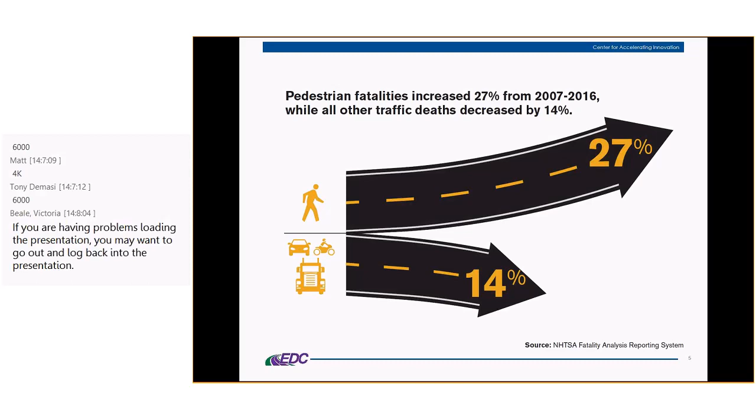And just another quick fact, GHSA, the Governors Highway Safety Association, just recently had a press release, and I'll put the link in the chat pod. But unfortunately, they are estimating that 2018 is going to have the highest pedestrian fatality rate since 1990, so more than 6,200 pedestrians killed. So I'll make sure I put that link in there.

Yeah, that's not good news, and so we've got a lot of work to do. So this slide, Becky, shows the trend going in the wrong direction for pedestrians. But we are making progress with regards to other modes, aren't we? I mean, we've been putting a lot of effort into strategic highway safety plans and other types of efforts in the other modes. And I'd say we've done some things in the past with pedestrians, but we can definitely do more, and we need to ramp up. So absolutely.

I'm almost wondering if we should ask another poll. Yeah, those are the national numbers. I think now, since we're talking to an Ohio audience, let's have them see if they can answer these questions here. So give them a few minutes, or not a few minutes, but maybe a minute. Sure, they can work quickly. And if you just want to pick the question that you want to ask, you can just put it down there in the chat pod.

The percent increase in pedestrian fatalities, and now this is just for Ohio, and then how many people died. So Becky, in 2017, these are the numbers, and in the latest report they did a comparison between '17 and '18, and I looked at Ohio, and they did actually increase as far as pedestrian fatalities. So, okay.

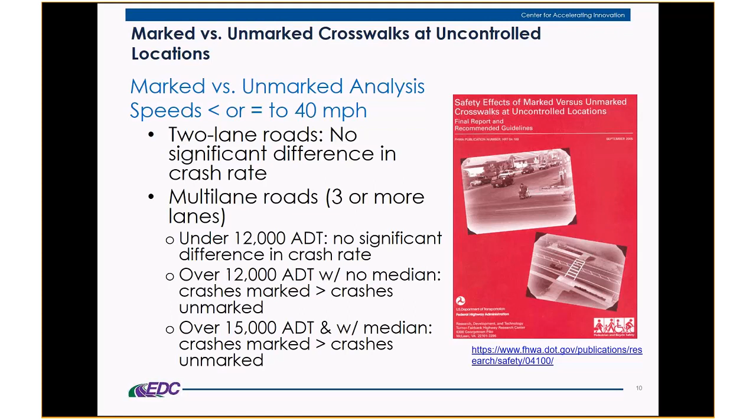And so people thought, well, then I won't put marked crosswalks out there on those types of situations, right? Well, that's not what the study was saying. It actually is saying that you need to do more than just a marked crosswalk in those situations.

And in the 2009 MUTCD, they changed the language, added a section with regards to new marked crosswalks. New marked crosswalks alone without other measures designed to reduce traffic speeds, shorten crossing distances, enhance driver awareness of the crossing, and/or provide active warning of pedestrian presence should not be installed across uncontrolled roadways where the speed limit exceeds 40 miles per hour and/or either in those situations with 4 or more lanes, and then with ADTs of 15,000 or 12,000 without a median and 15,000 even with a median.

The key thing here is that those other measures to reduce traffic speeds, shorten crossing distances, enhance driver awareness of the crossing - those are important, and those are the treatments that we're going to be getting into that help with regards to that, those additional treatments in addition to just marked crosswalks.

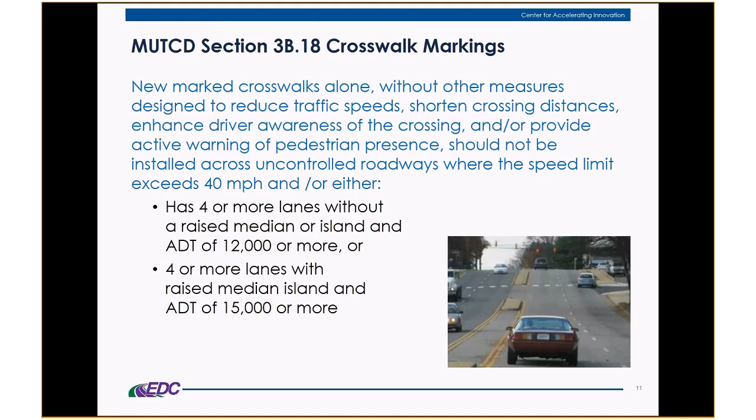So the study back then in 2005, often referred to as the Zegeer study, it did have a table in there with regards to the ADT, the speeds, and the number of lanes, and it talked about candidate, potential, and then also not marking - C, P, and N. They just used these letters to designate what they should potentially do.

What we did under the STEP, the last round in 2018, was develop this guide, the Guide for Improving Pedestrian Safety at Uncontrolled Crossing Locations, made a similar table to the Zegeer study, but then actually recommended - and these are just guidelines, these are recommendations - for some different treatments.

So let me give you an enlargement, and then you'll be provided the PDF for this presentation today, so you can easily access the hyperlink to download the guide. But you can see here that you've got the ADTs, the speeds, and then the number of lanes, and then the recommended, what we call the Spectacular 6.

And you may have picked up that we mentioned the Spectacular 7 earlier, and I'll explain why that is now. But back then in round 4, we had the Spectacular 6, which would help with these crossings at uncontrolled locations. Now that's the other thing - uncontrolled locations, meaning no signals, no stop signs, okay? Because the majority of crashes happen at crossings, and a high percentage happen at uncontrolled locations.

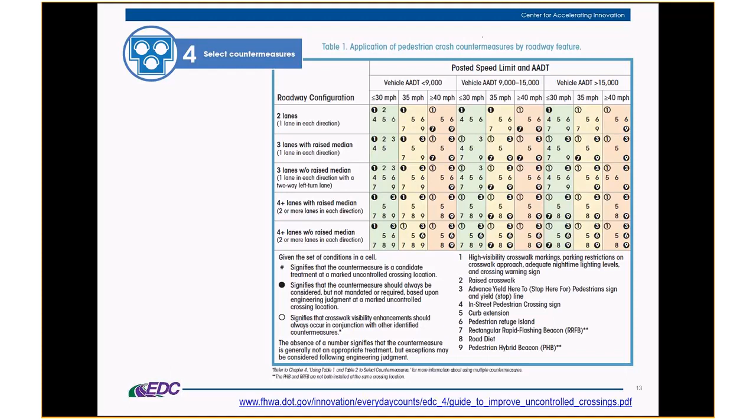In this round of STEP 5, we are including crossings in general at all crossing locations, even at signalized locations. So we are going to be bringing in the leading pedestrian interval for signalized locations. Now, some of these treatments here also can be used at signalized locations, but when we developed this guide at that time, it was mainly for uncontrolled locations.

The guide also goes into a 6-step process with regards to what you can do to improve pedestrian safety, which starts with the data collection, doing inventories, crash analysis, and then step 4, which is selecting countermeasures - which I'm going to just quickly introduce you to the Spectacular 7 - and then looking at your design guides, resources, other types of opportunities, standards that are out there. And then step 6, which is actually implementation and opportunities and how to overcome barriers. So, great guide - we recommend that you would download that.

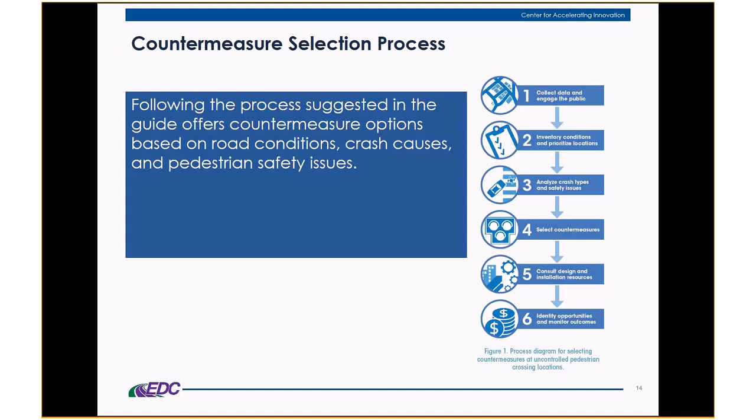But as mentioned, I'm going to mainly be focusing today on the spectacular 7, with the leading pedestrian interval being more for signalized locations. So those 7: crosswalk visibility enhancements, raised crosswalks, pedestrian refuge islands, the RRFB which is back and we're very happy that it's back, the PHB (pedestrian hybrid beacon), road diets which has been around for a while, and then the LPI.

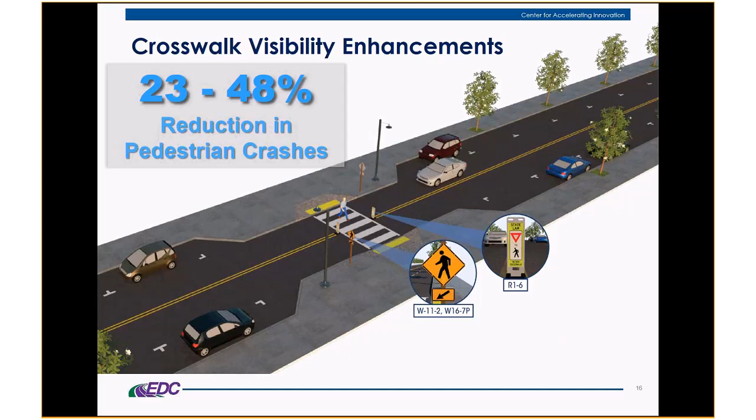Okay, so let me just quickly go through these. The crosswalk visibility enhancements have a great crash reduction factor, with a range between 23 to 48. The reason there's a range is because we try to incorporate as many other types of countermeasures into this, such as signing, curb extensions, curb radii, lighting, markings. So it covers multiple countermeasures, with subcategories within the crosswalk visibility enhancements.

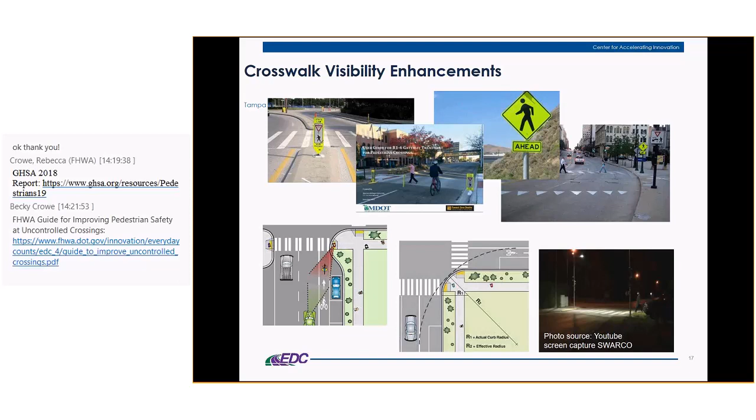Great research on the gateway with regards to the in-street sign. You'll see that up in the upper left-hand corner where they're using it as a gateway, multiple signs. This is a low-cost treatment. There's some additional research happening in Michigan and Florida with regard to those. We'd love to talk to you more about that in the future in our workshops.

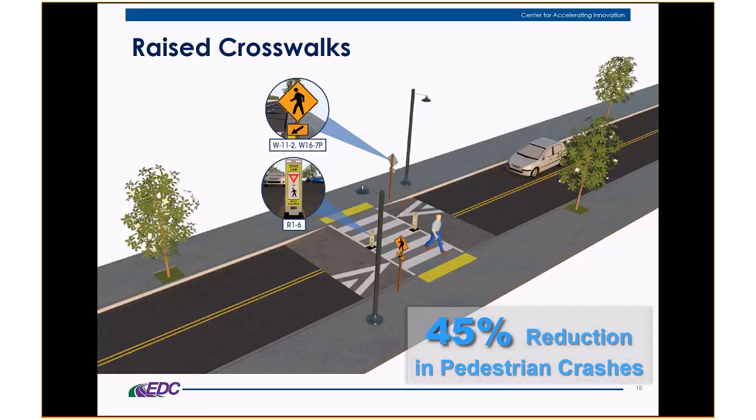The raised crosswalk has a 45% crash reduction factor, works great especially on slower 2 to 3 lane roads with slower speeds, but there are some considerations like snow plowing and so forth. All these STEP treatments do have some limitations, and we talk about that. You're not going to put raised crosswalks on 45 mile per hour roadways. So we will talk about in some of the treatments in the workshops where the appropriate applications are.

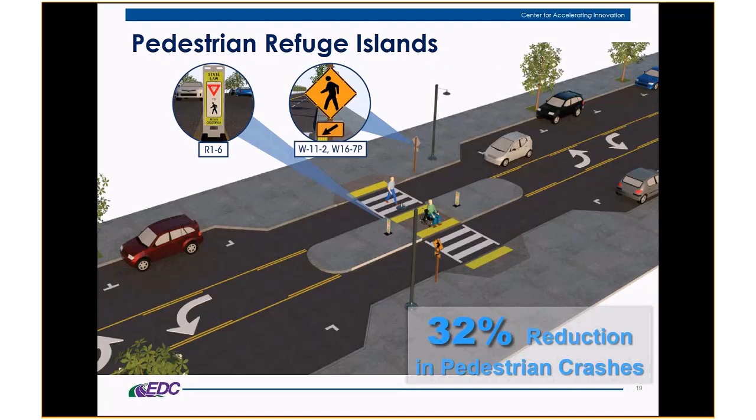Pedestrian refuge islands have been around for a long time. I call them the oldie but the goodie. 32% crash reduction factor, but it's great, especially when you have a 2-way left turn lane there, to provide some protection, breaks up that crossing so pedestrians only have to look in one direction and then the other direction to cross the roadway. Very effective but underutilized, we believe.

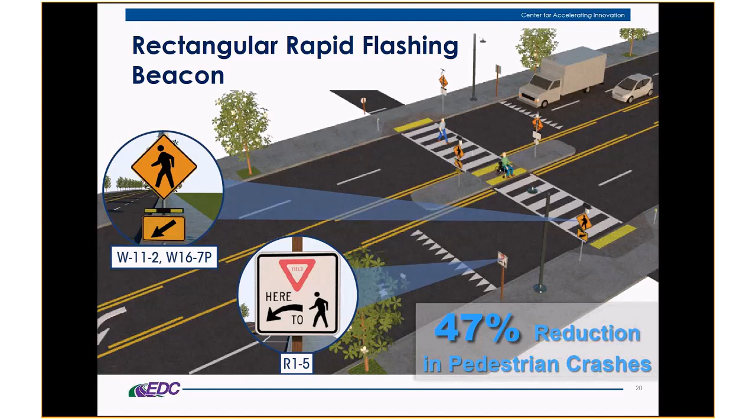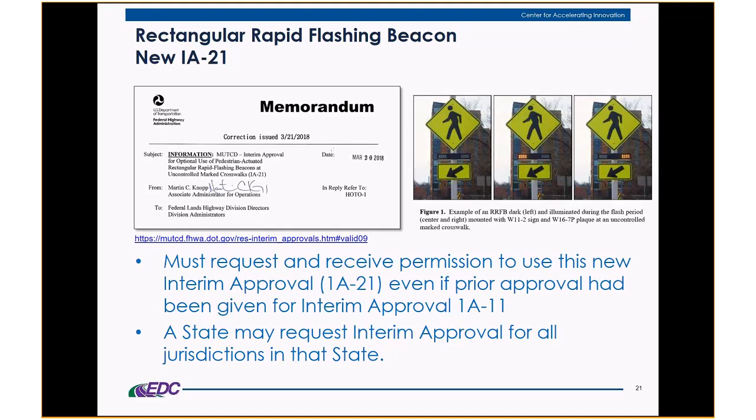Now the rectangular rapid flashing beacon, it's back. We're very happy that it's back, and many of you are probably familiar with this. We do have a new interim approval 21, so 11 is out. I suspect that Ohio probably did a blanket statement statewide, like a lot of other states, to have all agencies under that to be able to use interim approval 21. I've got the link there that you can take a look at, but just a couple of highlights with regards to the interim approval.

You do have to have 2, one on each side of the roadway. Now if you have a median, as in this situation, you can go ahead and put that in the median. But you do need to have one on the left and the right side, and these are best used on multi-lane roadways to get drivers' attention from quite a distance back to let them know that there are pedestrians wanting to cross at that roadway.

Once again, this isn't a... I just a few months ago heard about a situation where they were using, they had put some of these out on a 6-lane roadway, high speed, even with the advanced signing with the RRFB. So they had 4 altogether in one direction, and they had some fatalities. So there is an upper limit as to where these are going to be able to be used.

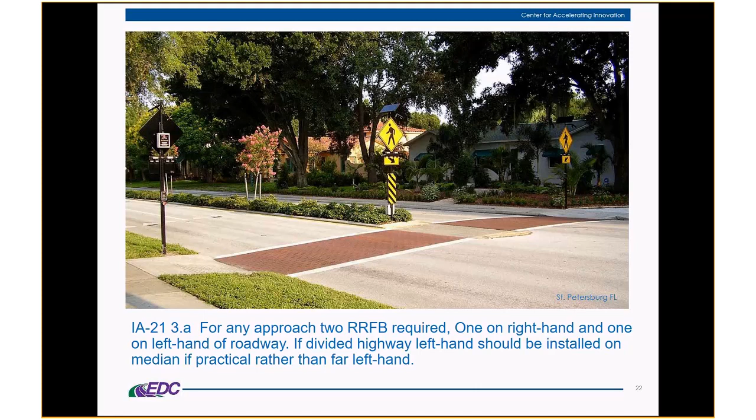We're still learning a lot. So with that, you do want to be careful with the application of these. Usually 30 to 35 miles per hour, maybe even 40 if you've been using them a lot, but making sure you have the proper installation that would work.

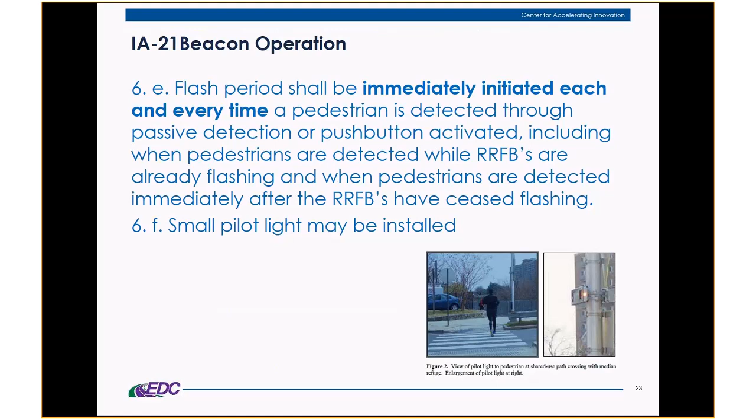These also, interim approval 21 states that the flash period shall be immediately initiated each and every time a pedestrian is detected, whether through passive detection or push button activation. So that's what I love about this. You push it, they get that signal indication to drivers that the pedestrian is wanting to cross. There's no delay on this.

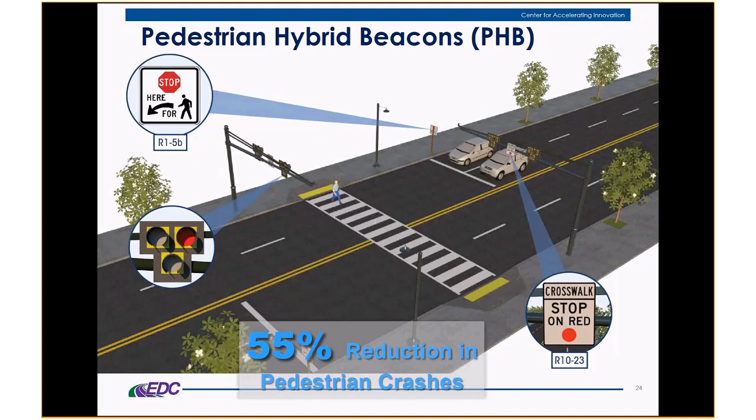Now I give that example with regards to the 6-lane high-speed road. Those types of roads really, many of them, you're probably going to have to go to the pedestrian hybrid beacon or a signal. But the pedestrian hybrid beacon I really like because it really does a good balance between pedestrians and having vehicle progression as well. So, 55% crash reduction factor of pedestrian crashes here. This is how the phasing is.

You can see here on the wigwag, that's where the vehicles stop. If the pedestrian is cleared, they go ahead and proceed. So it's a great application with regards to mid-block crossings, especially.

You can actually coordinate this with signals. A lot of agencies will do it during peak hour, coordinate, and then do a hot response on off-peak hours so that pedestrians get the signal fairly quickly and not have to wait.

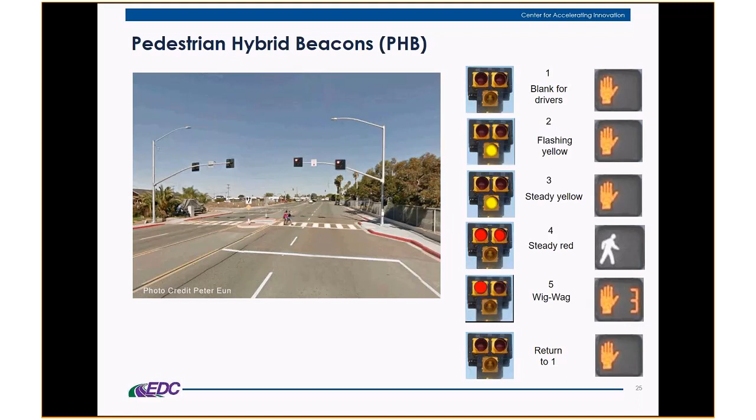There's one other point I'd like to make with the pedestrian hybrid beacon. We're seeing across the country, some states thinking that the guidelines in the MUTCD for pedestrian hybrid beacons are actually a warrant. Now there is a signal warrant. I've overlaid that, the minimum number of pedestrians needed per hour, 93, to put in a signal.

But for pedestrian hybrid beacons, these are guidelines, they're not warrants. As far as the national standard, some states have actually made it more restrictive and made it an actual requirement to have minimums, which we would not recommend. I think you always want to allow for engineering judgment.

Just to note, the tables in the MUTCD are guidelines for that 20. So maybe you have 18, or maybe even 10, but you've got a situation where you want to put a PHB in. Using that engineering judgment, doing that engineering study, you're allowed to do that. And oftentimes there's latent demand, so there is some flexibility with that.

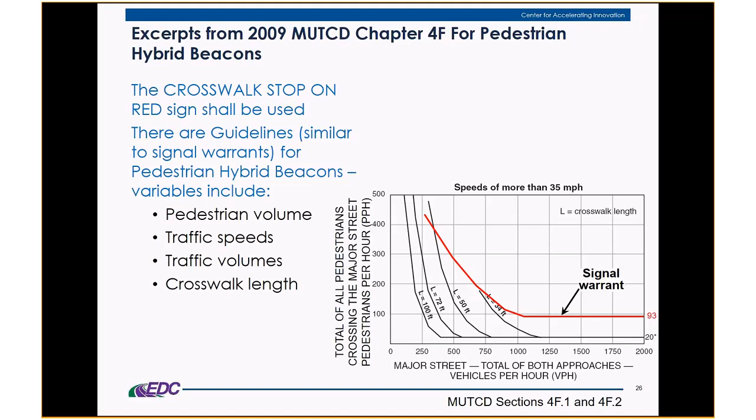And with that, hey, I'm going to have Becky. Yes, well, I just wanted to talk about the success story that we have in Florida.

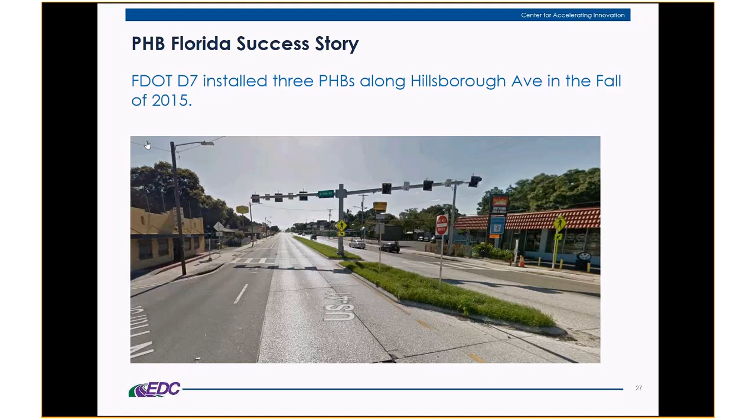They have been using PHBs along Hillsborough Avenue, and they installed those in 2015. They were having a big problem with crashes, up in the double digits in terms of fatals. You can see their crashes from 2010 all the way down to 2015, and after they installed these 3 PHBs, they had a significant reduction. So just a lot of success using those PHBs in Florida. We love spreading that information around.

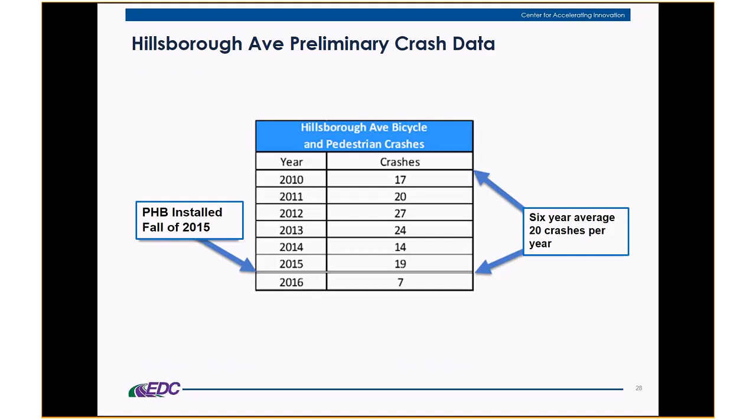The next, I guess final, countermeasure that we're working to advance are road diets. I've been working with road diets for the past 6 years. I know we have several of those in Ohio, and I believe we've done some training up there.

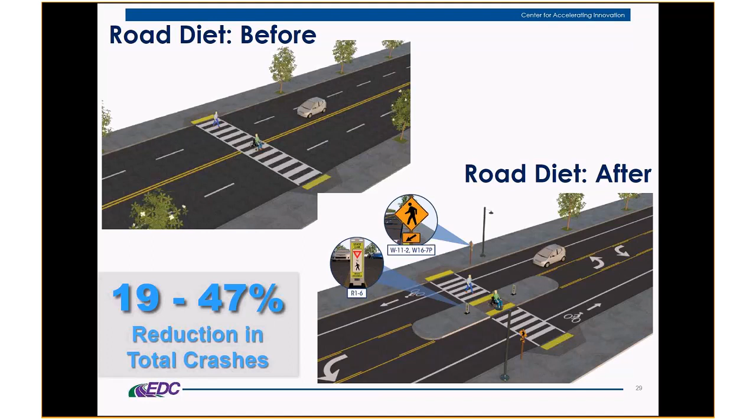You can see that 19 to 47% reduction in crashes, especially when you include that median there. It really does provide a safe refuge for pedestrians, and it's very inexpensive, especially if you have an overlay project and it's just a matter of restriping the roadway.

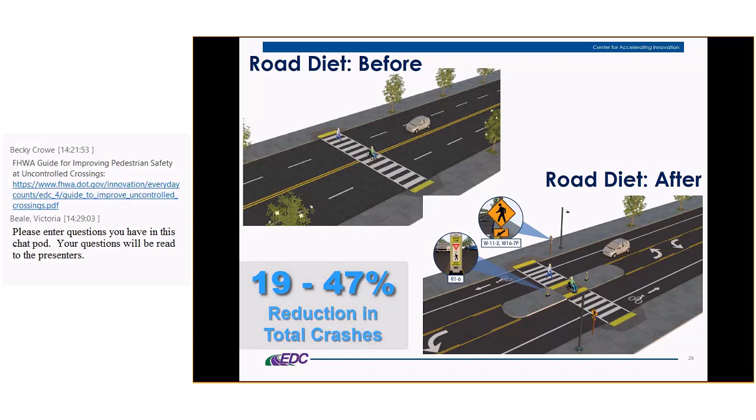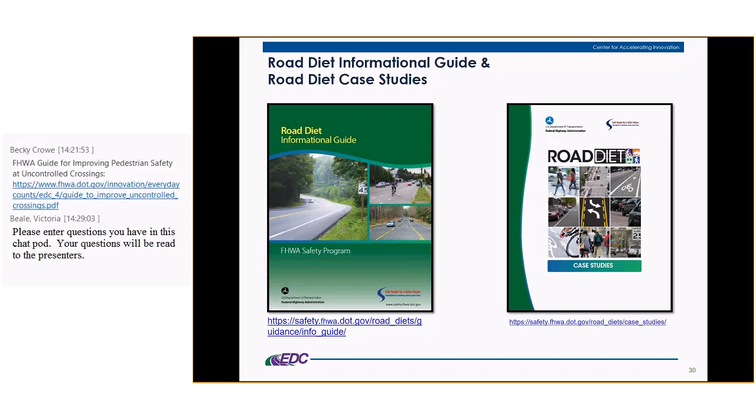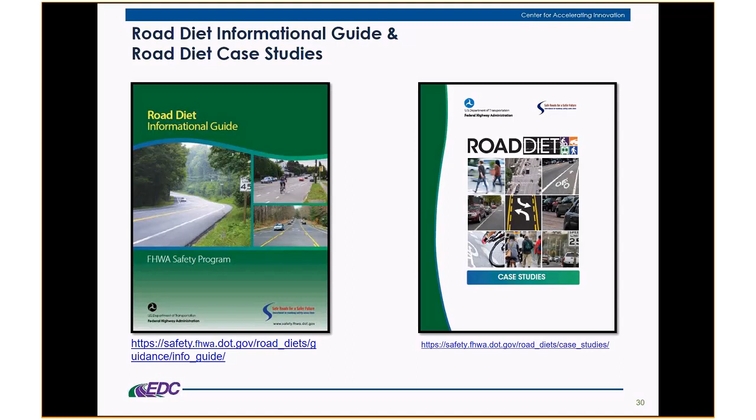We do have a lot of good guidance for road diets, when it makes sense to put those in. We've developed the informational guide that's available online, and you can download it. We have a number of case studies similar to the Florida Hillsborough Avenue study, where they've implemented a road diet or roadway reconfiguration and had some really great results. There are a lot of considerations in terms of road diets, when to put those in.

First and foremost, there's safety. Operations were really focused on the peak hour when you're looking at a road diet.

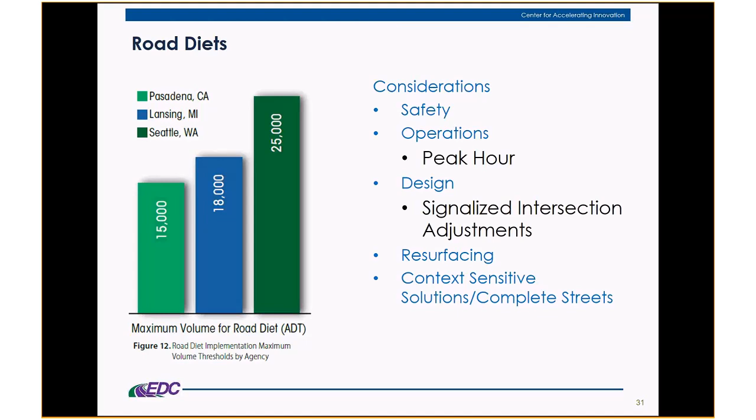Another thing I'd like to bring up in terms of intersections is roundabouts and road diets, they just work so well together. The dog bone design, we're seeing it used all over the country. Just a really safe design to consider.

And then something we always like to bring up with road diets is that you really need to make sure you focus on those signalized intersections and make sure they are working properly after you reconfigure the roadway. So with that, I think we have some fun, don't we, Peter?

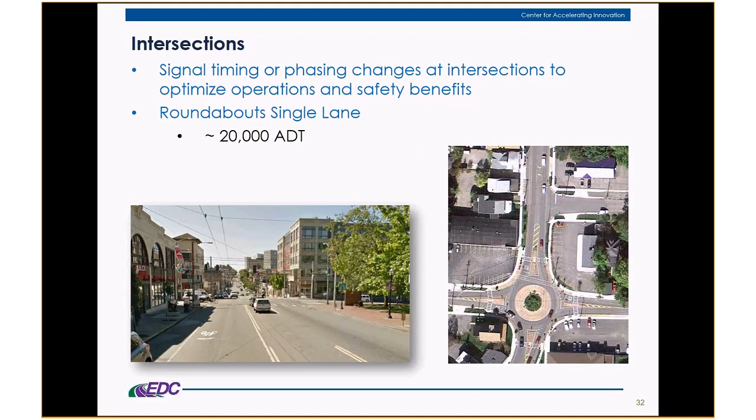Yeah, I think the audience probably wants to take a little bit of break, like in a live talk show, they always have music, right? Music always makes people happy. I love music. So we got an original, this is the number one music video on the Engineers Billboard charts. It's actually written and sung by our own Wayne Emmington of Federal Highways in the Maine Division Office. Let's go ahead and enjoy this. Hopefully this works.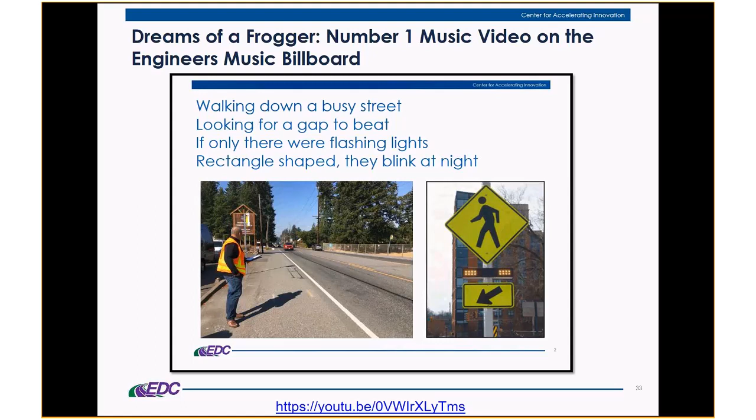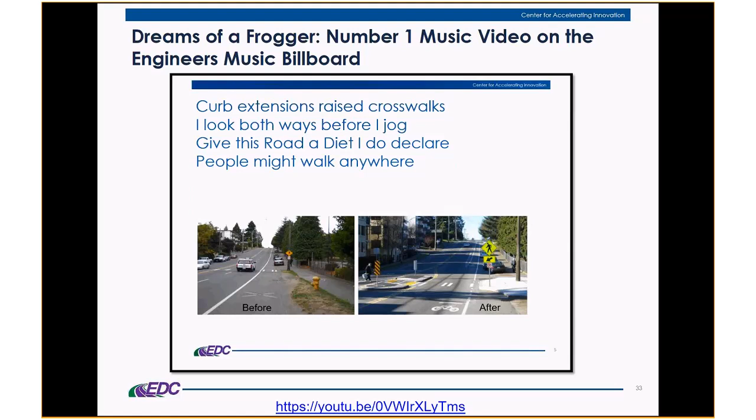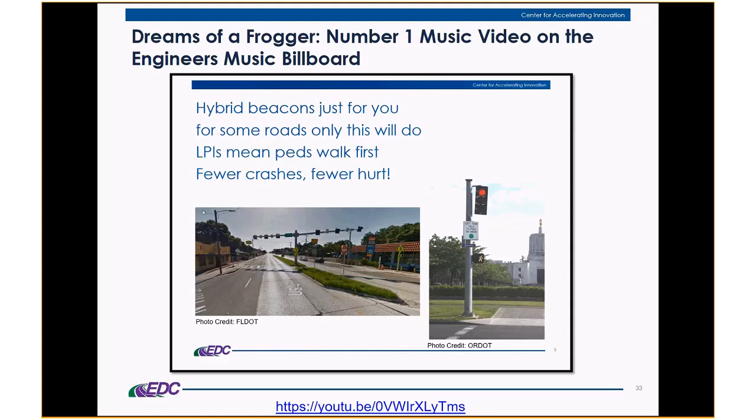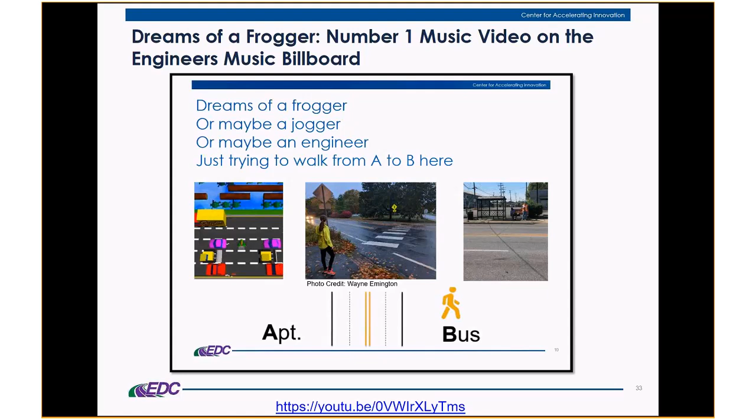All right. Did that come through there, Becky? It did. I feel like we need to clap. Yeah, that was great. All right. Yeah, that was a great job. By Wayne Emington. Love that song, and we're actually trying to get him on Jimmy Fallon to sing it. So, hey, we got some claps in the chat pod. I hope everybody got a chance to maybe play a game of Frogger as we were waiting for the webinar to start.

But there is method to our madness. The reason that we put Frogger up there is because the main point we're trying to make is that it's very similar to real life. When a pedestrian's out there, they're trying to find a gap in traffic, look both ways. If people are making a lot of turning movements, they get impatient, they're in a hurry, it's difficult. In the past, when Peter and I have actually used Frogger in training environments in person, you can see people getting very nervous. They're trying to move Frogger through. So what we're trying to get the point across is that we're just trying to make it easier on everyone, on the pedestrian

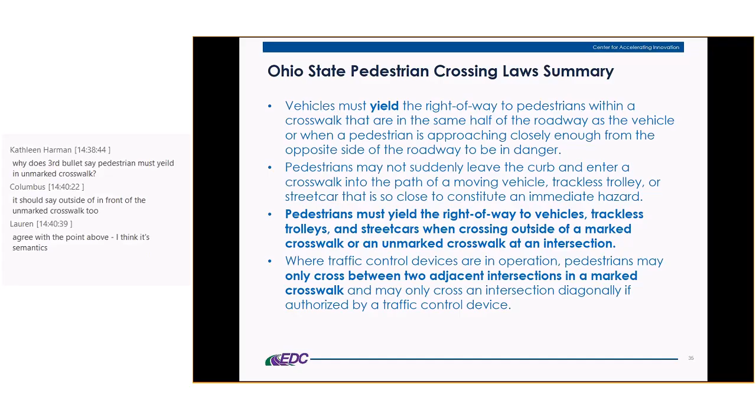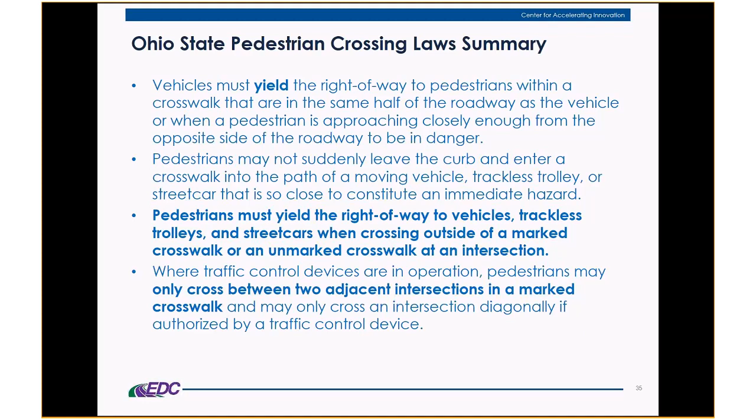Yeah, that's why we have the whole legal system. So very good catch, though, because the way you could read that, the way I just read that, you're right - it says pedestrians must yield. But in all other states that I've seen, pedestrians at an unmarked crosswalk at an intersection, the drivers are supposed to yield, whether marked or unmarked. So we'll take a look at that. Thank you for whoever wrote that comment.

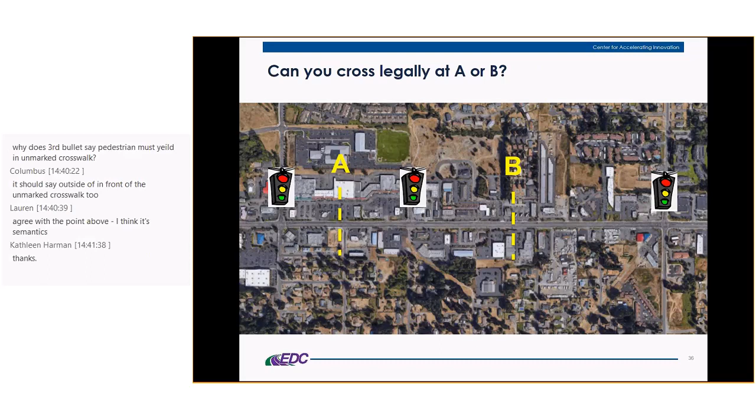So in this situation, can you legally cross at A or B? I don't know, let's see if we get some comments in the chat pod on this. Are we getting some responses there, Becky, Victoria? Not yet, but it looks like at A there is a continuation of a street, correct? Yes, there's a T intersection there. And so based upon how we're interpreting what we just read, maybe there's some confusion.

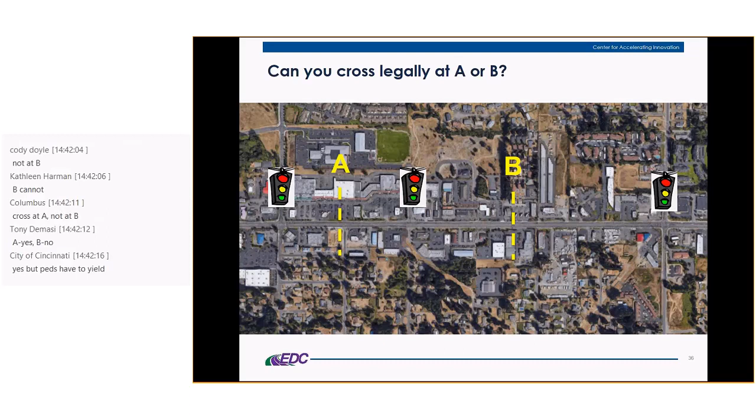So yes, if it's not marked, then maybe the pedestrians have to yield to the vehicles. But in every other state, even though it's not marked, the drivers are supposed to yield to the pedestrians. Now in B, there's less - based upon what was written there, and it's pretty standard across the country in a lot of states, because there's no roadway in between those two signalized intersections, pedestrians are not allowed to cross at B. They have to go to one of those signalized locations, which could be a mile apart, could be a couple miles apart.

How many are willing to go that far to go to a controlled crossing? We had a lot of those in the chat pod, a lot of no's, so you got a lot of correct responses. Okay, great. So they understand that point, and we're going to have to take a look at...

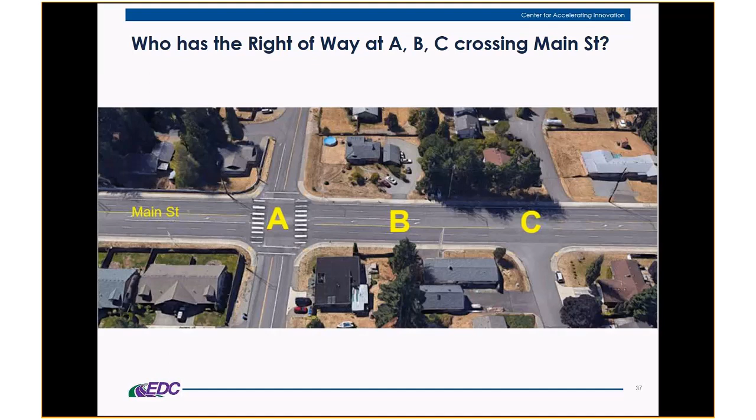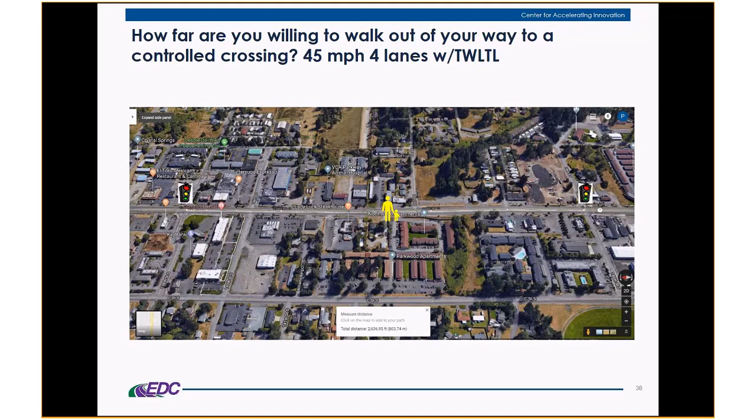So how many are willing to walk out of their way to a controlled crossing? Saw this earlier. This is actually about a half a mile between those two signals. You can see here there's some apartments right sort of in the center. And if they want to get across that street, this is a 45-mile-per-hour roadway, 4 lanes with 2-way left turn lane, okay?

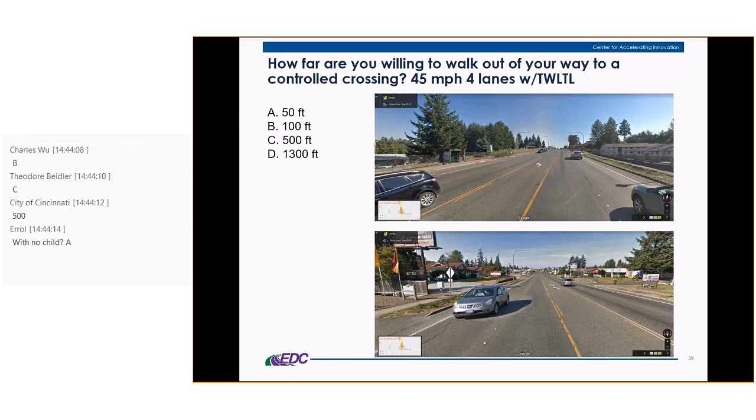How many of you are willing to walk 50 feet out of your way, or 100 feet, 500, or 1,300? Maybe we can just wait a few seconds to get some responses of what people are willing, in Ohio, how far they're willing to walk out of their way to go to a controlled crossing. You can see there's a bus stop on the other side, and it's hard to even see those signals way down there. I suspect many are.

While you've got your responses coming in, Ron Garcheski, who's the safety engineer at our Ohio Division office, put the Ohio Revised Code section in the chat pod for everybody. It's 4511.48, right of way yielded by pedestrian. It says every pedestrian crossing a roadway at any point other than within a marked crosswalk or within an unmarked crosswalk at an intersection shall yield the right of way to all vehicles, trackless trolleys, or streetcars upon the roadway.

So there you go. Okay. So that it is consistent with other states. I think the way that the language that I pulled it from, there's a website that shows all 50 state crosswalk laws, and I think they probably just typed that in inappropriately. So I will have them change that.

Thank you for that. And you've got a lot of B's, Peter. You've got a lot of people saying B, C, just so that you get an idea of what people are. And then someone wrote in there with no children, A.

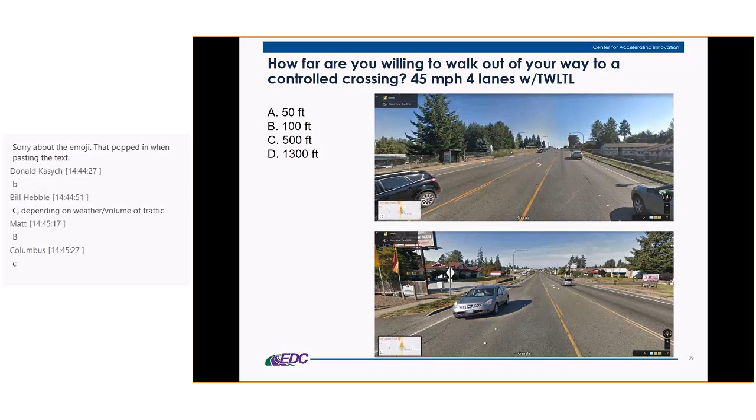And so, but this is where our table, our step treatment guide sort of comes in handy, because you do want to provide some treatments. Who's going to expect those people to go to those control crossing locations when most of us wouldn't?

I'm going to try to, we're a little bit on, we want to leave some opportunities for questions as well, so go through this. Are we getting any responses, Becky?

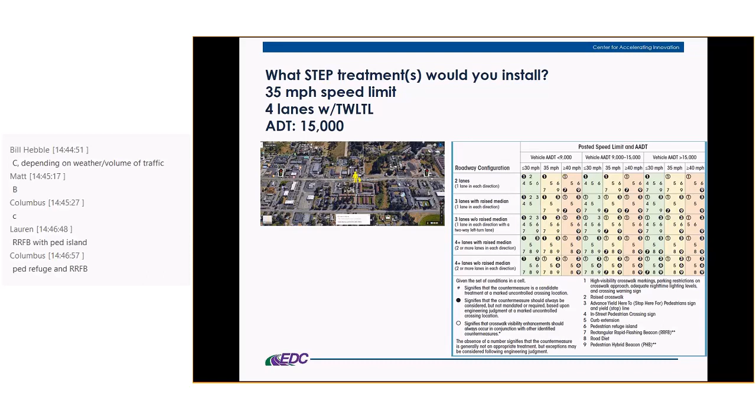Looks like we've got an RRFB with a pedestrian island. Okay, great. Ped refuge and RRFB. Okay. A road diet.

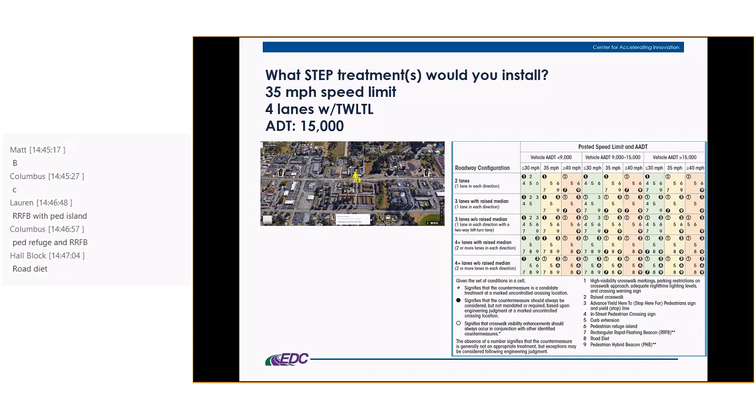Okay, great. So it looks like they're pulling from the table. I should have probably showed which square that's going to come from, but it looks like they're pulling from the appropriate one. Now that 15,000 is really on that boundary, so they may even bump it up to greater than 15,000 in some situations. But so some engineering judgment there, but at least they're getting the appropriate treatments there, sort of the higher end ones.

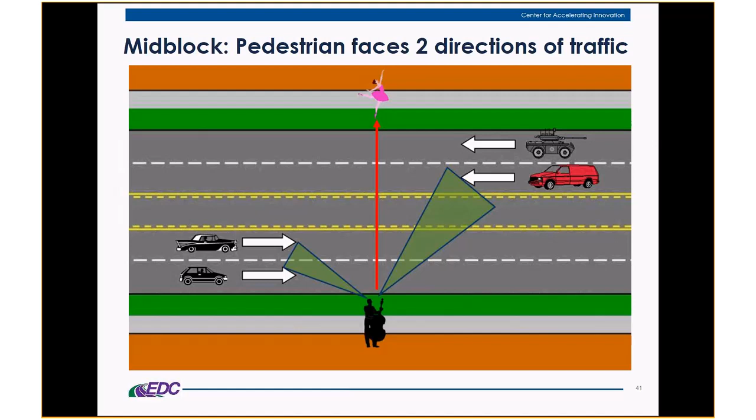Great. By the way, is it more challenging? We tell people to go to intersections or signalized locations, but is it better to cross mid-block or at intersections? At mid-block, you're only having to look at traffic in one direction and then the other direction.

But at an intersection, whether uncontrolled or signalized, you do have more turning movements that you have to be aware of. So there are 4 different zones that you have to be looking at rather than just 2.

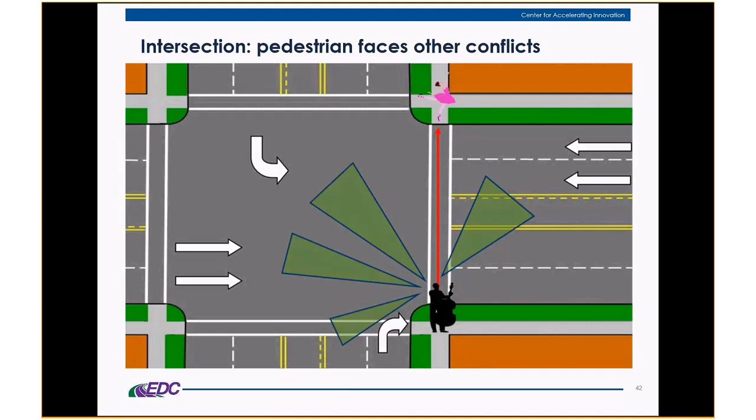I want to share this example. This is in Tukwila, Washington State. They have a mid-block crossing that was installed just 300 feet from the signalized location. There's a bus stop on the far side and a Bartell's on the near side. Every pedestrian I watched during my 20 minutes of observation went to the RRFB rather than the signalized location. I think part of the reason is that they were getting a quick response.

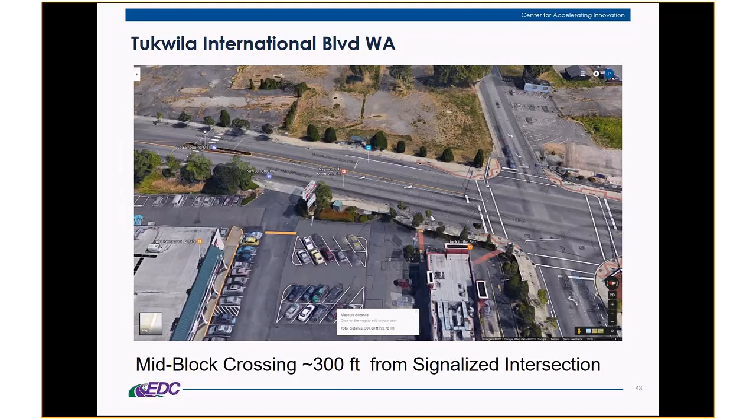So this is the street view. There was an RRFB and a median island, very well done. There was really no delay to vehicles backing up into the intersection. It was a great application where it wasn't a steady, constant flow of pedestrians—just a constant crossing maybe every 5 to 10 minutes, and it didn't impede traffic. Vehicles were stopping appropriately.

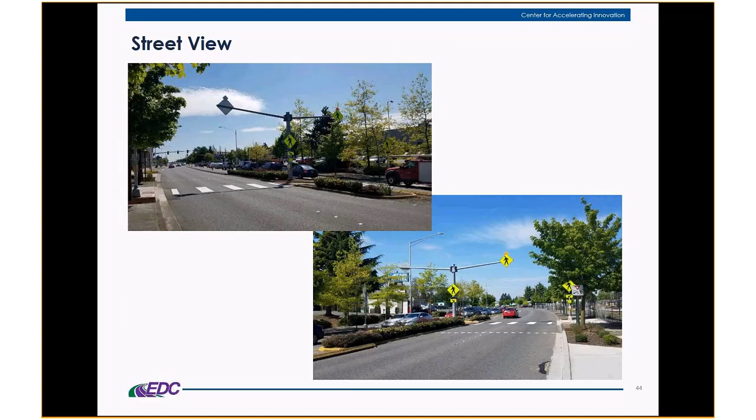But the one treatment we want to talk about with regards to the signalized intersection, which they could probably improve at this Tukwila location, is the leading pedestrian interval. It's a very simple concept at signalized locations, with a 59% crash reduction factor. Basically it gives pedestrians a 3 to 5 second head start so they can get established out into the intersection, so that drivers, whether left turners or right turners, can see them and realize they have to wait for the pedestrians.

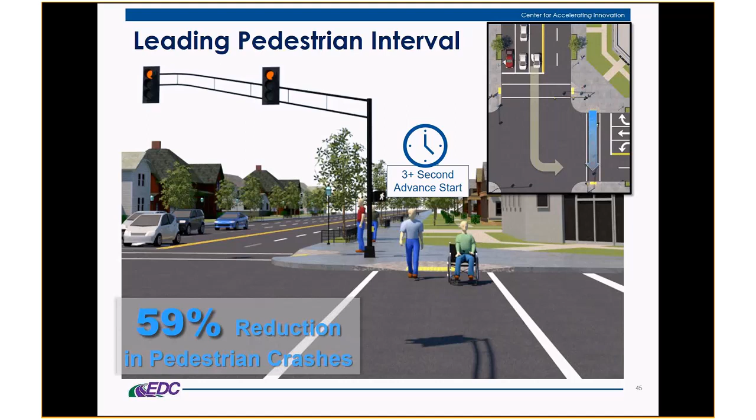There are some places where drivers are a little more aggressive—they just want to make those turns and get going, and they don't even allow pedestrians to step off the curb. So combining the LPI with a no turn on red can also work well together and be quite effective. There'll be a lot more information coming out on LPIs shortly.

So that is the Spectacular 7. Once again, the LPI is used at signalized intersections, while all the others are in the guide for improving pedestrian crossings at uncontrolled locations.

And so with that, I'm going to have Becky maybe just remind us once again.